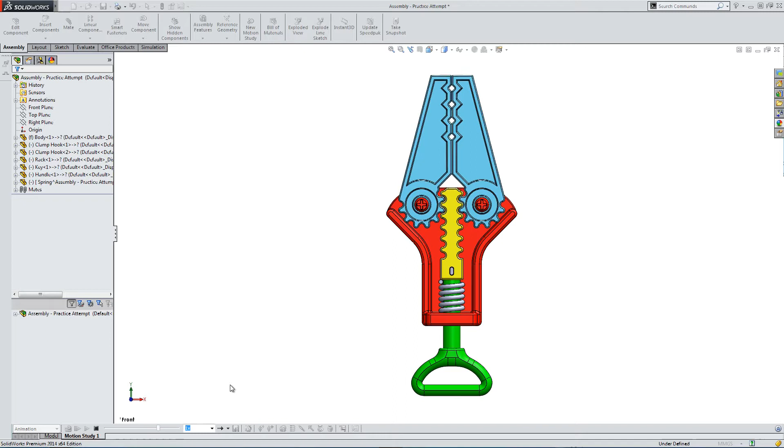Okay, so what we have here, we have a couple of gears and we have a functional spring. You can see that the spring's compressing and the cogs and the rack are moving in unison to close the clamp. The handle meets a hard stop at the bottom, and the clamp sections also meet a hard stop at either side. So let's start from scratch and put this together.

So I'm starting with a new assembly. I've pre-modelled all my parts, so let's draw them in. So I've got a body, a clamp, a handle, a key, a rack. There's no spring at the moment.

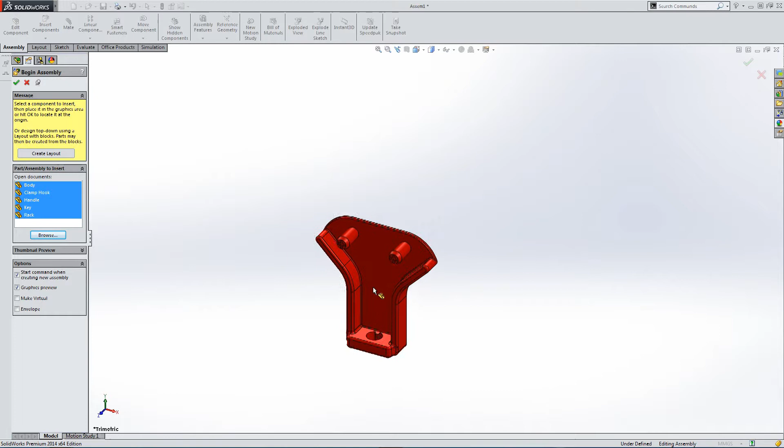So let's first place the body. Clamp times 2 - you only need one model. My handle, the rack, and then let's place the key.

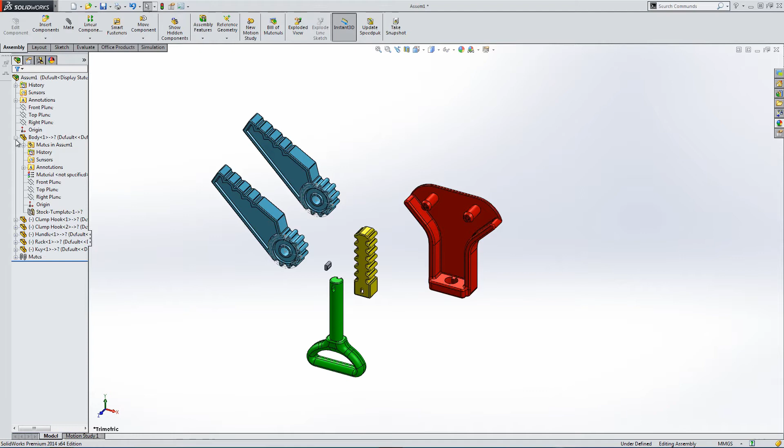So the first thing I need to do is turn off this fixed position for the first component that was entered. So we're going to make this body float, and then we're going to mate it to the assembly planes, the front to front, top to top - this is part to assembly basically - and right to right. And this is going to be helpful later on when we add a component. We'll see this later on.

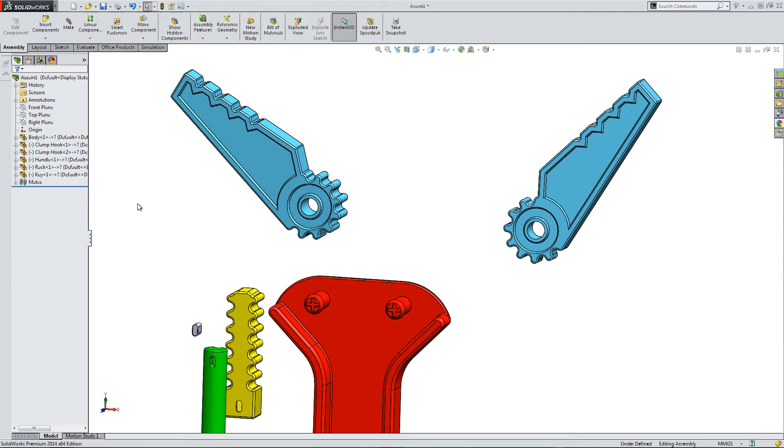So let's put the clamp jaws in place. We're going to use basic mates wherever possible. We're going to avoid any kind of tangency mates because they can cause some issues in animations, and they especially did during the practice trial runs for this. So we're going to avoid any kind of tangency mate, but really basic mates where possible.

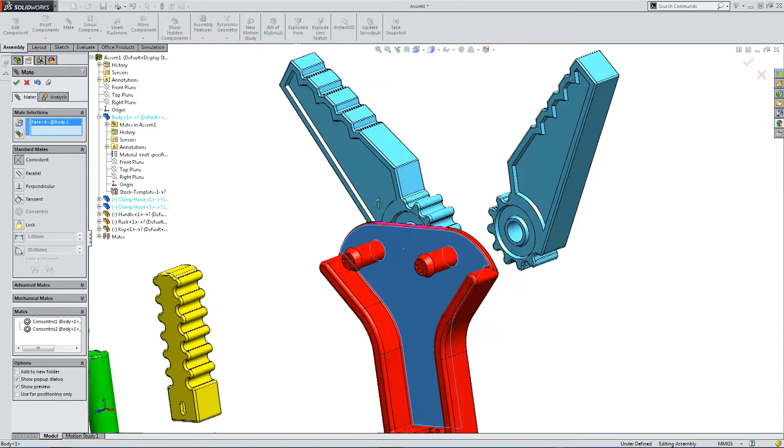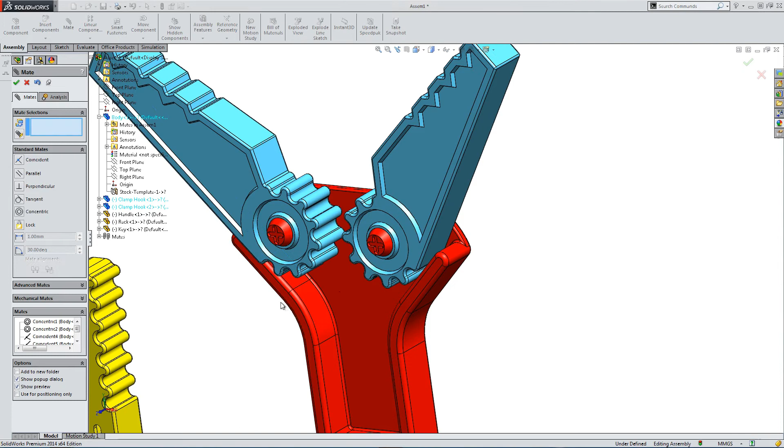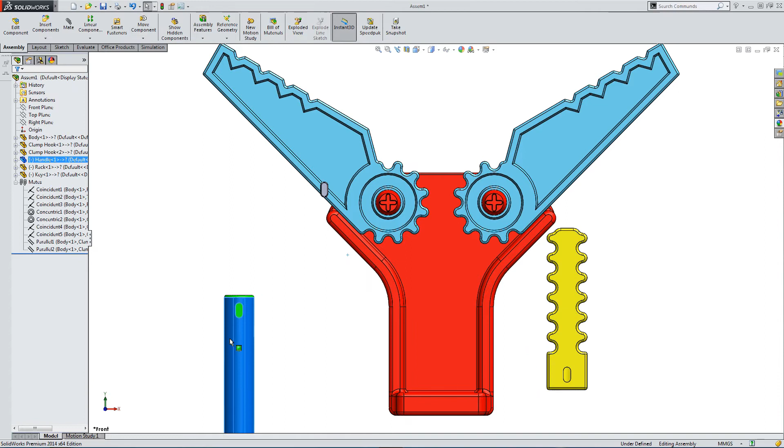And I'm now adding a parallel alignment here. You can see, so these parallel alignments, these are just to place the part. And at the moment, the part is fully constrained, so that both clamp hooks are fully constrained. But as you can see, there's no minus. They're fully constrained at the moment, but this is just to get them exactly where I want them, and I'll turn this mate off later.

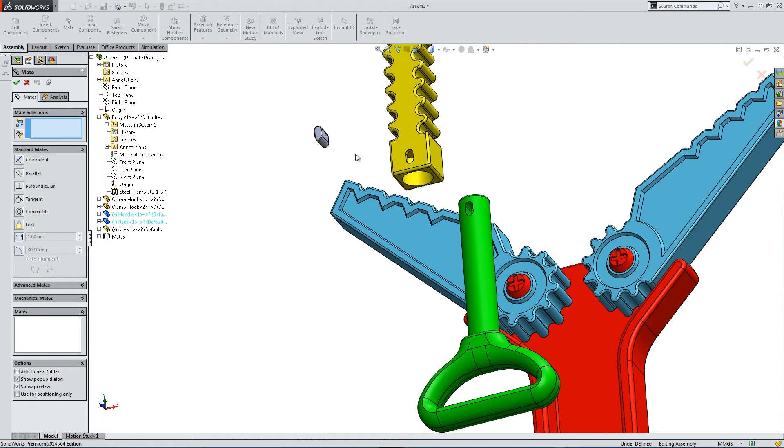So now you have a conundrum of whether to attach the rack to the handle or attach the handle to the body. So I think I'm going to attach the handle to the body. So I've got a little keyway here just to align the handle. I found during the trial runs for this tutorial that not having a keyway to align to did cause some issues, so I've opted to add it in.

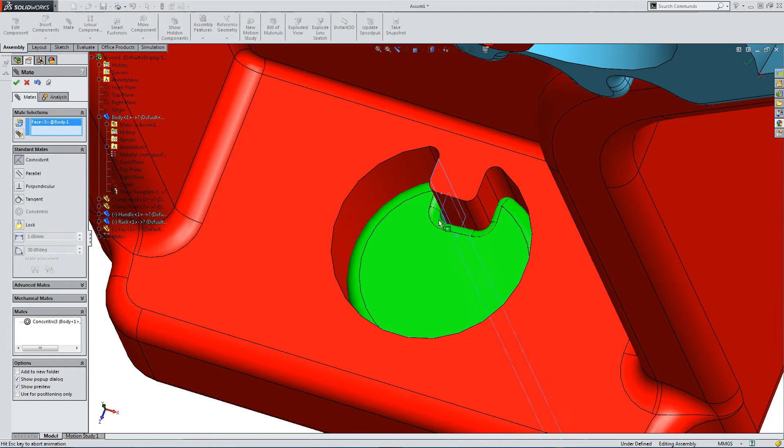So here we have our handle, and I'm going to add this mate, which I can turn on and off, and this is just for alignment. So this is the handle meeting its hard stop, can go no further.

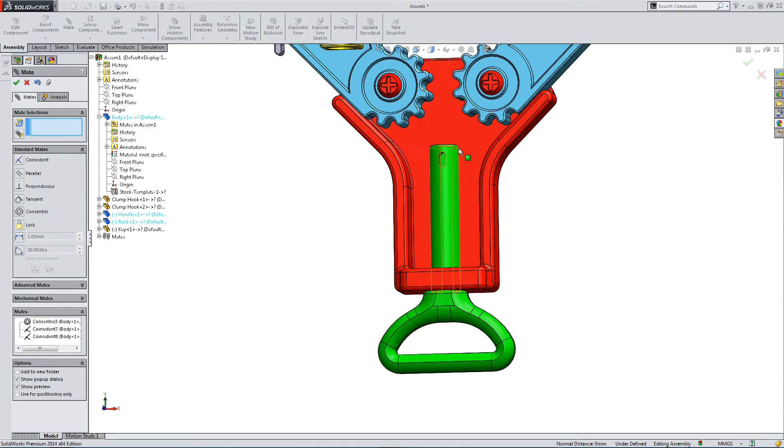And now we need to place the rack. So let's put the rack where it needs to go, attach it to the handle. And then we're going to pin it using our key.

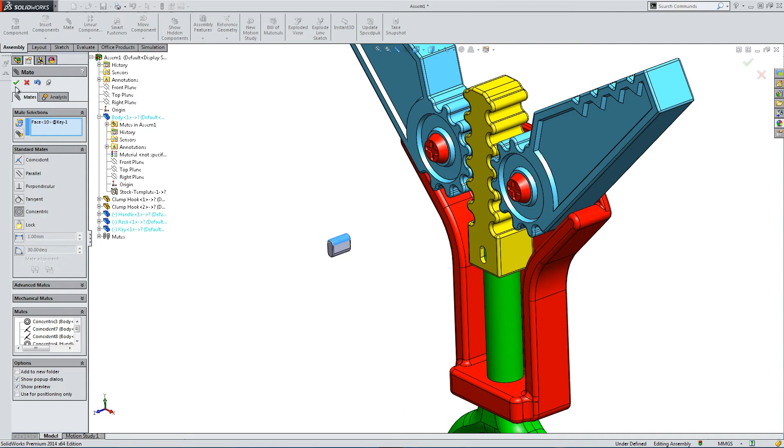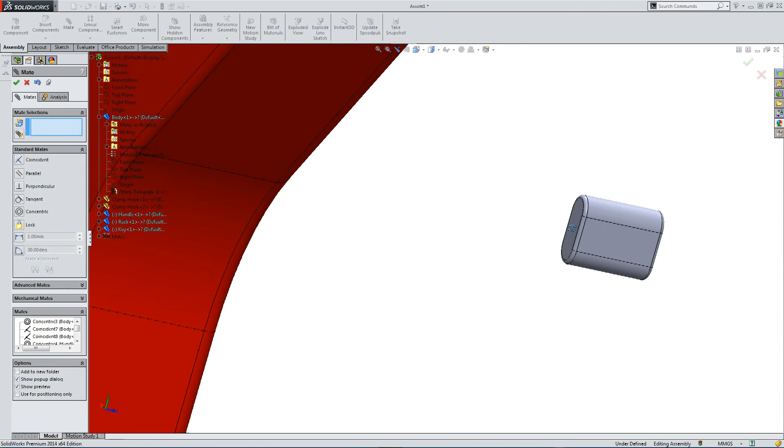Okay, so we're just going to go with concentric. Oh, I've deselected the part, so let's get in close. Select the second face. Key is now concentric, or the top of the key is, and now the bottom of the key is. And then we can move it, and the key just needs to be constrained. It needs one more mate. Coincident mate, and it's in place.

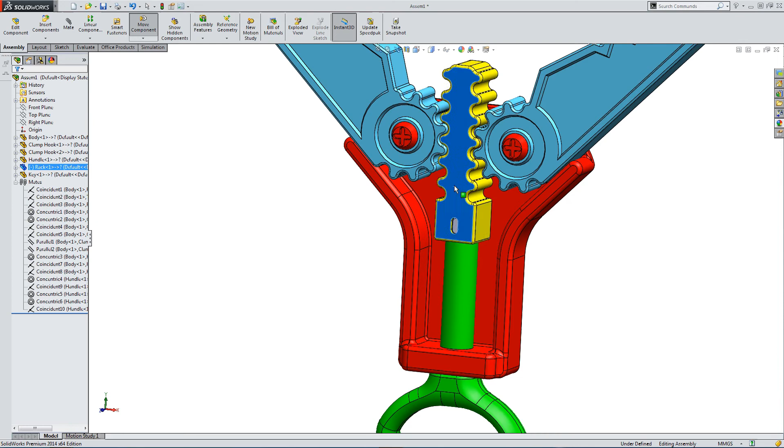Now the rack's not quite pinned. We need to stop it rotating. It looks good at the moment, but it's still able to move, and you can tell that by looking in the parts tree, the left hand side, the little minus figure. So I'm just going to pin it using this concentric mate to the key.

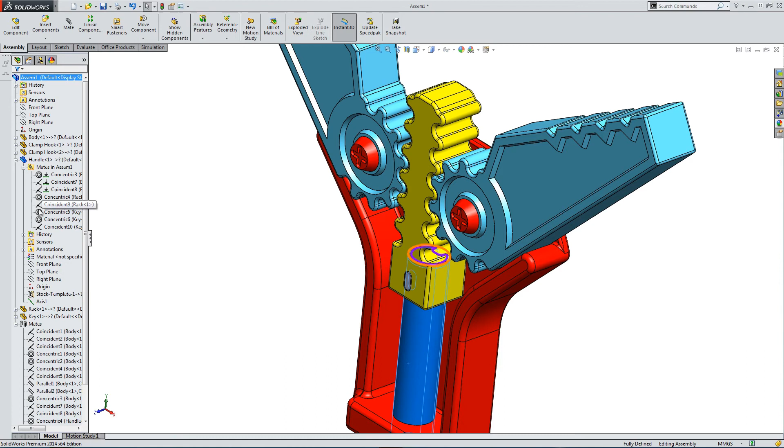Okay, so now you can see on the left hand side all the mates - there's no minus figures next to the description. Everything's fully constrained, but there's 3 mates that I want to turn off now, and I will be doing that in the next video, where we're going to start making some of these parts move.

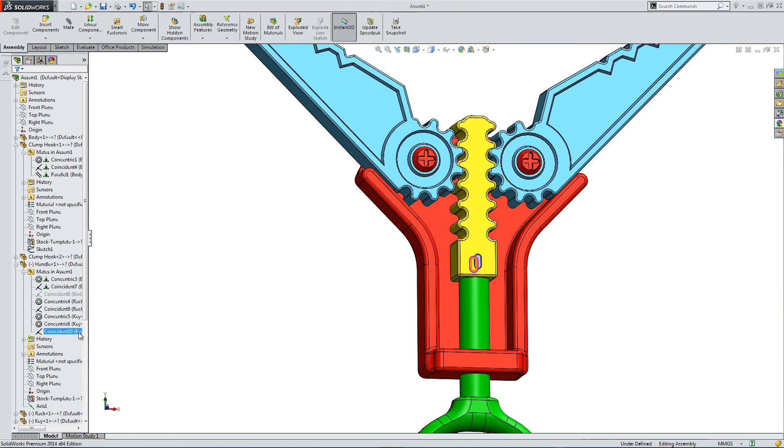But for now, I'm just showing you that everything, the parts that I want to move, will move when we turn off the parallel mate that was constraining the cog. Let's turn the handle backstop back on, and you can see everything's aligned. So it's really important that you get everything aligned, and this will leave us in good stead moving into the next video.